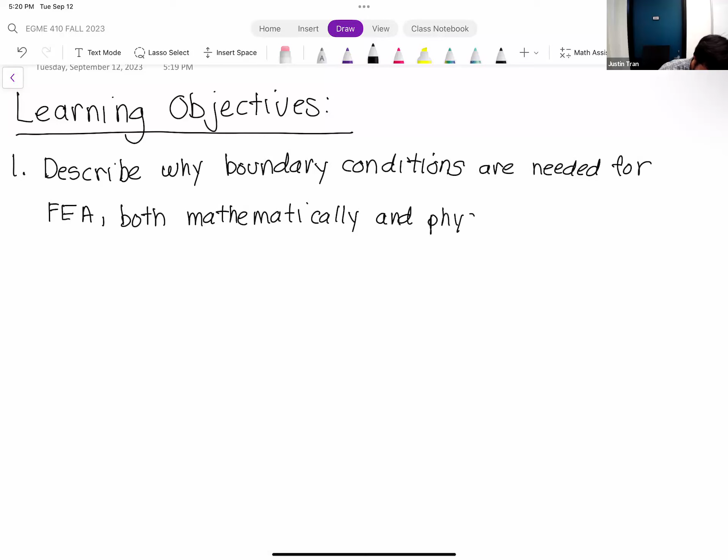We're looking over it, making sure we did it all, and it's pretty close. I'm mostly grading for completeness. I'm not really looking too carefully, so as long as all the figures are there and they were reasonable, then that's all. With this many students, it's hard for you to look really in detail.

So I'll definitely do that for the projects, for sure - the midterm project, final project. But for the activities, just because we kind of do a lot of practice, yeah, they're mostly just practice, they're for educational purposes and for fun. So I'm not really doing any assessment on the activity.

Well shoot, that would be great. It's similar to how you did it, yes, just doing it, yes. Optimization is a little bit different just because there's a lot more mathematical stuff that I can check, and so I will be grading that one. But just one problem per homework.

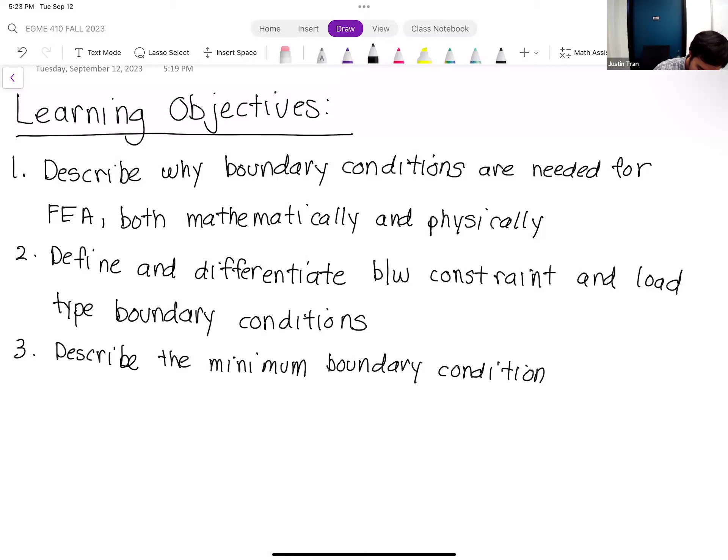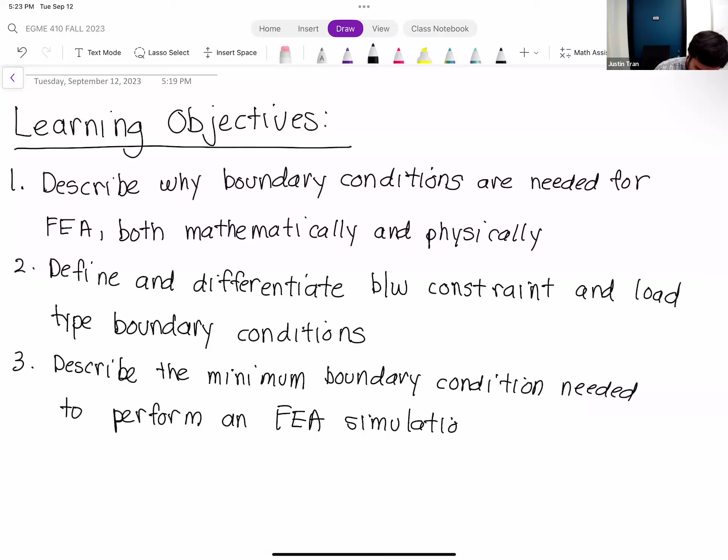That's my whole life plus more on top. Yeah.

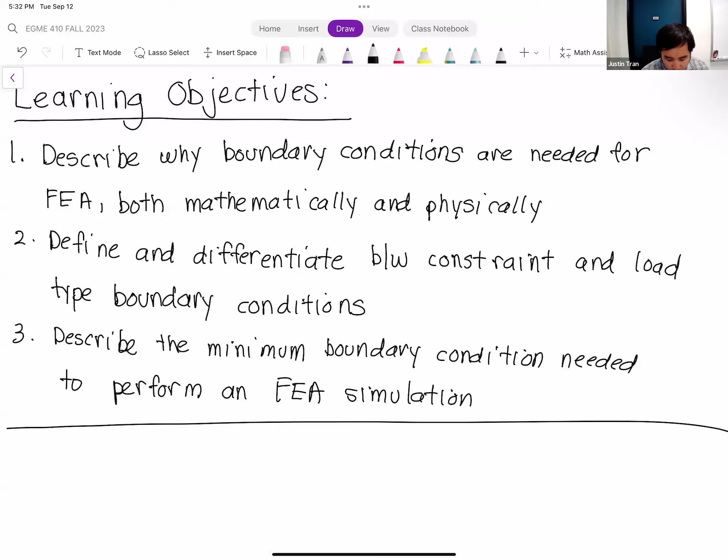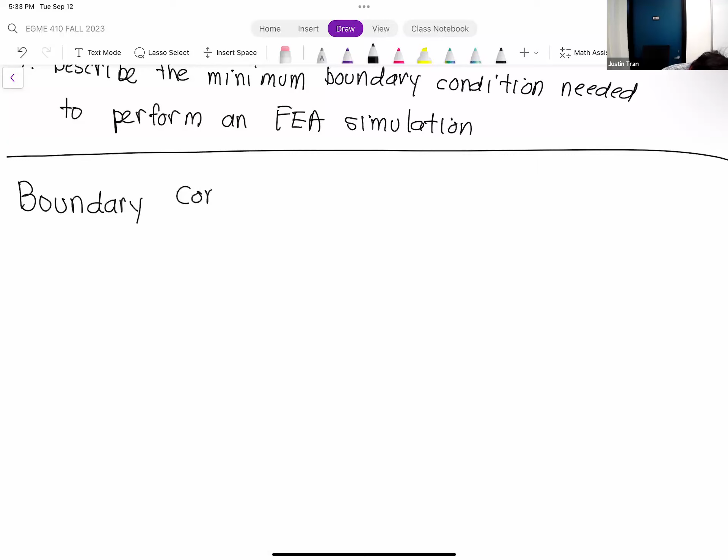So like I mentioned just a minute ago, last Tuesday we talked about meshing, which I think is one of the major steps of applying FEA, especially when you're using commercial software. Meshing is always the first step. The second step is boundary conditions. So boundary conditions are also something that's really, really important.

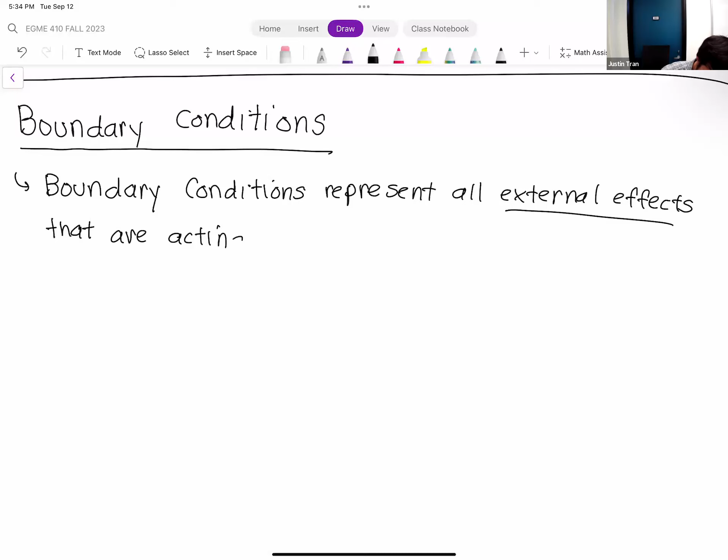All right, so what are boundary conditions? Boundary conditions, in a nutshell, describe all the external effects that are acting on your geometry or acting on your simulation. Any kind of external load or external support, anything that's external to your geometry that's having an effect structurally on your geometry, we almost always capture those in terms of boundary conditions. So that would be kind of the physical definition of boundary conditions and why we need that.

But there's actually a very important mathematical reason for boundary conditions as well. If you remember, from the first week of class, I said that FEA, at its core, is solving differential equations, right? So you have your geometry, you have your CAD file, and what FEA is going to do is solve the equations for structural mechanics, heat transfer, fluid mechanics, whatever. And whenever you have a differential equation, you need to have some boundary conditions on that equation in order to find a full solution.

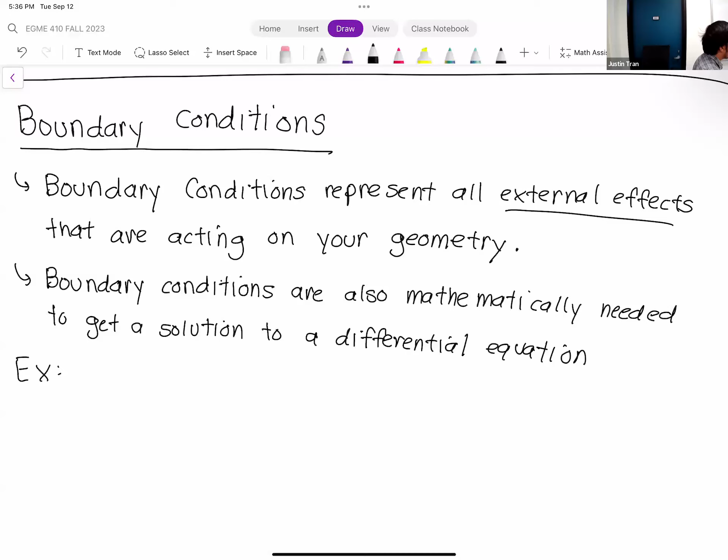So let's solve for a solution to this ODE. We have d squared u dx squared is equal to 3x. Very, very simple ODE, so we don't even need any kind of integrating factor, we don't need the characteristic equation. We can just solve this straight up by integrating.

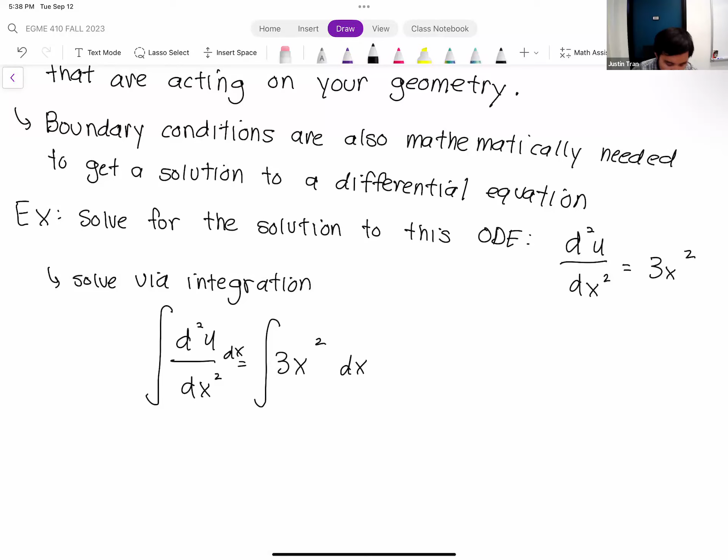We have d squared u dx squared is equal to 3x squared. I'm just writing it down again to make it convenient for me to solve this. All right, so let's take an integral of both sides with respect to x, dx. We integrate the left-hand side, it's going to cancel out one of the derivatives, so we have du dx equal to the integral of 3x squared. So the integral of 3x squared, we do the opposite power rule here, take the antiderivative, we get x cubed.

But since this is an indefinite integral, we don't have bounds on these integrals, we're just taking the integral in general, so we have to add an arbitrary constant to this. We'll call that C1.

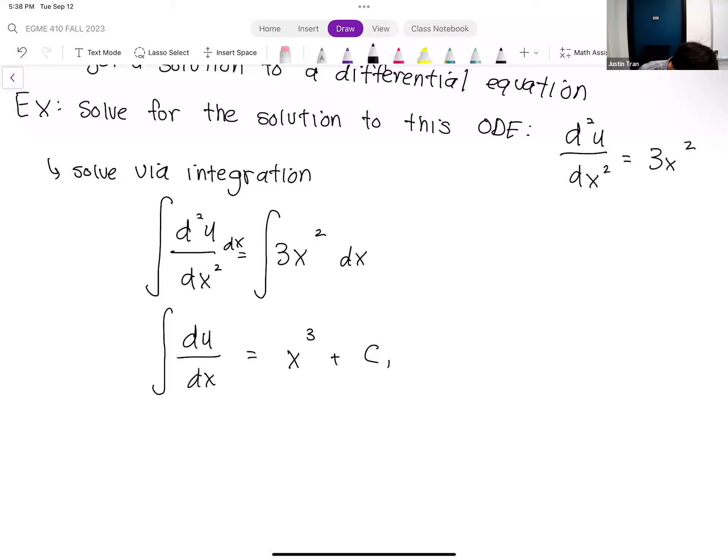Let's take another integral, so we integrate this again. Once again, on the left-hand side, our integral is going to cancel out with our derivative expression, and so we have u of x. On the right-hand side, we have 1/4 x to the 4th, that's the integral of x cubed. We have the integral of C1, where C1 is just a constant—if we take the integral of a constant, we just end up with x, so we have plus C1x. And then once again, since we're taking an indefinite integral, we have to add another arbitrary constant, and so we call that C2. Our solution to this ODE is u of x is equal to 1/4 x to the fourth plus C1x plus C2.

Just a little bit of trivia here: because our solution is arbitrary up to those two constants, we call this the general solution. Any questions on this? We can't say that we have the full solution yet because we're arbitrary up to those constants, so in order to get the full solution, we need to apply boundary conditions.

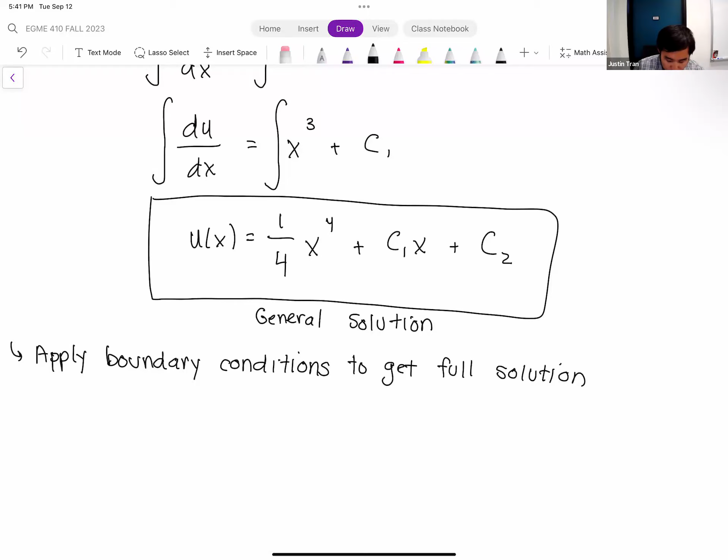All right, let's use two boundary conditions here because we have two constants. Let's say we have a boundary condition at x equal to 0, so we have u of 0 is equal to 18. And then let's say we have a derivative type boundary condition: du dx evaluated at x equal to 10 is equal to minus 5.

So we can apply these two boundary conditions to solve for C1 and C2. Let's start with boundary condition 1, that's the simplest to do. We have u of 0, so we take our general solution and plug in x equal to 0. We have 1/4 times 0 to the fourth plus C1 times 0 plus C2, equal to 18. Everything with the 0 just cancels out, and so we get C2 is equal to 18.

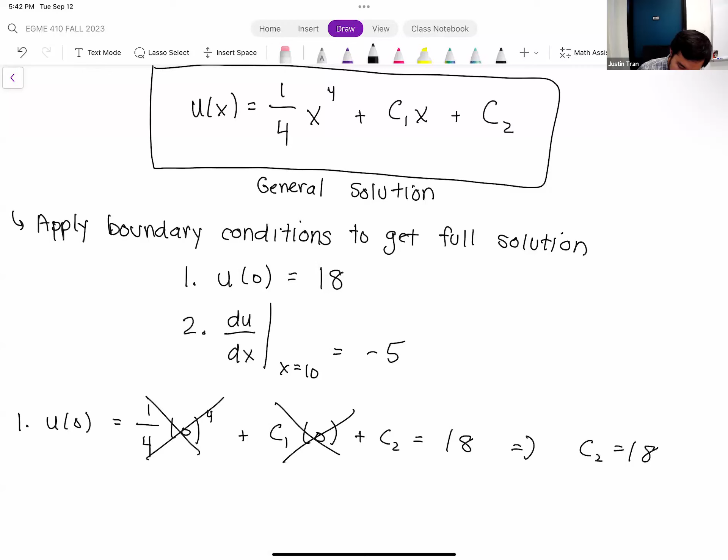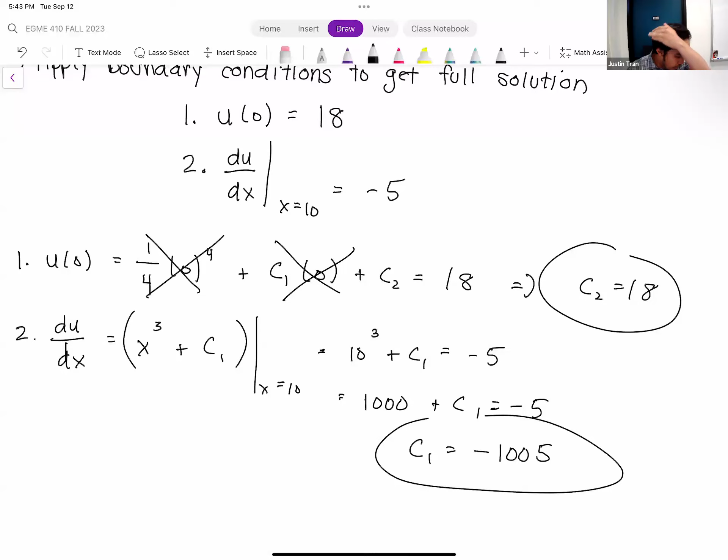So let's do du dx now. To apply this boundary condition, we need to take the derivative of our general solution. We take the derivative with respect to x, we get x cubed plus C1. We're going to evaluate this at x equal to 10, so we have 10 cubed plus C1 equal to minus 5. 10 cubed is 1,000, plus C1 is equal to minus 5. So we solve for C1: C1 is equal to minus 1,005. All right, let's go ahead and plug those in.

Right, and so if we plug those in, C1, C2, we can get our full solution for u of x. So u of x is equal to 1/4 x to the fourth minus 1,005 x plus 18.

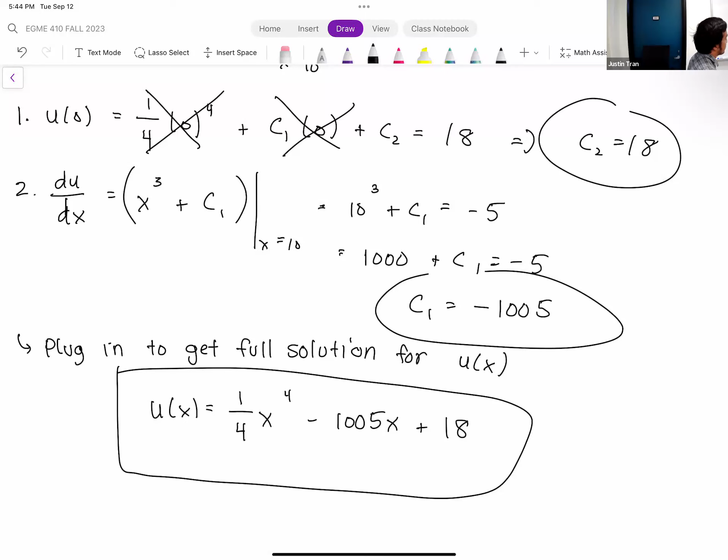Any questions on this example here?

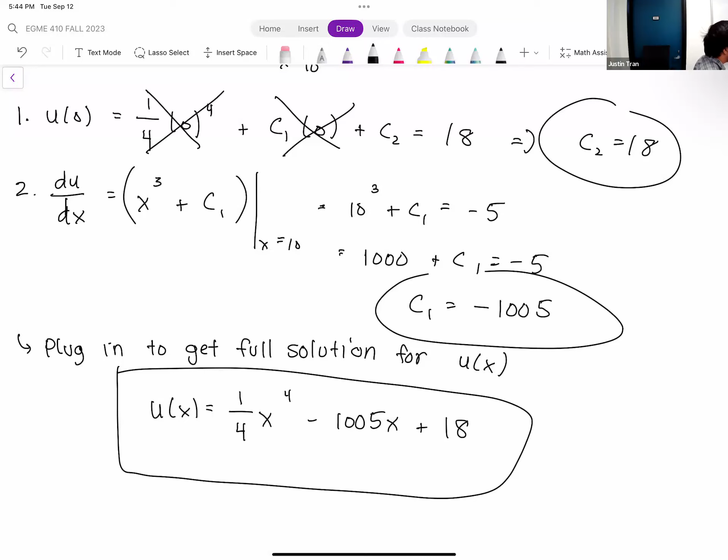I'll answer a question that I think everyone is asking right now: why are we doing math in this FEA class? Why are we doing differential equations? It's to prove a point. Just like when you're solving a differential equation by hand, your job isn't complete until you apply the boundary conditions. FEA is exactly the same. So your FEA simulation doesn't even do anything until you apply the boundary conditions.

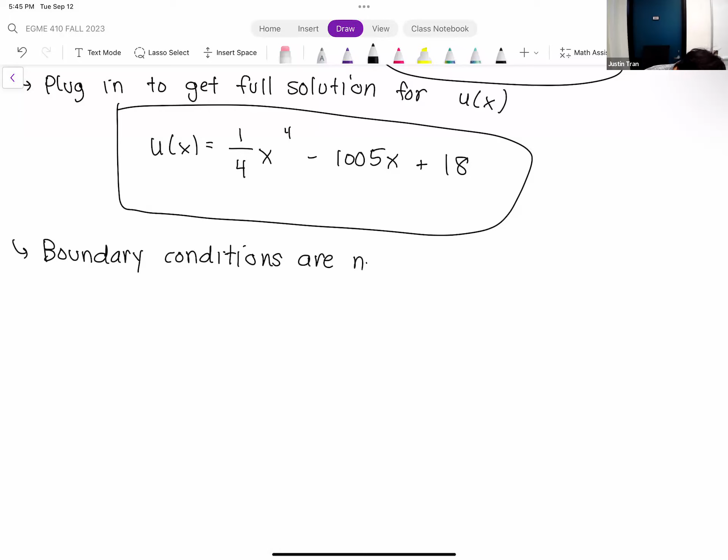In fact, I think some of you tried this last time. After you got done meshing the bike crank, some of you noticed that when you try to hit the solve button in ANSYS, it gives you an error. It says it doesn't know what to do without boundary conditions. So my objective for today is that you understand how to apply boundary conditions, and also why they're actually needed in an FEA simulation.

So mathematically, we can kind of see why in this previous example here, but I think once you understand the role that boundary conditions serve and what they represent, you'll see why they're really needed in FEA.

Along that line of thought, one way I like to think of boundary conditions is that they act as the instigators, or the ones that cause interesting behavior in your system. Maybe instigators isn't a great word, but maybe initiators, or the inputs for interesting behavior.

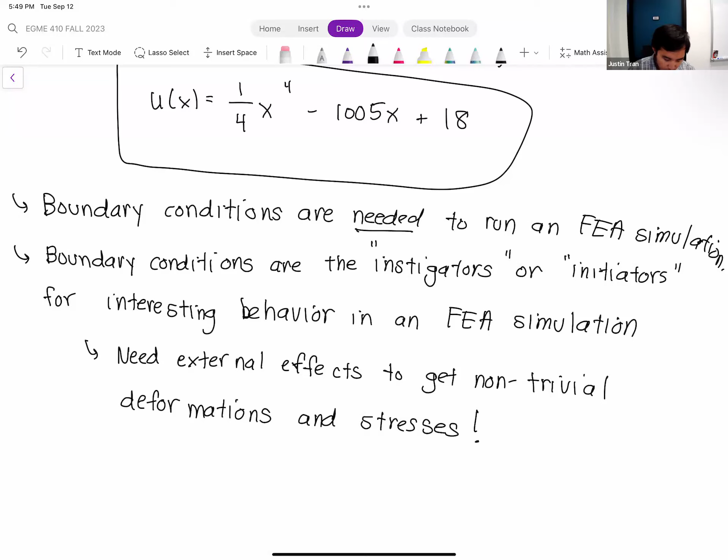So one way you can think of this is that your structure or your CAD geometry is just reacting to how the boundary conditions are, what the boundary conditions are doing to them.

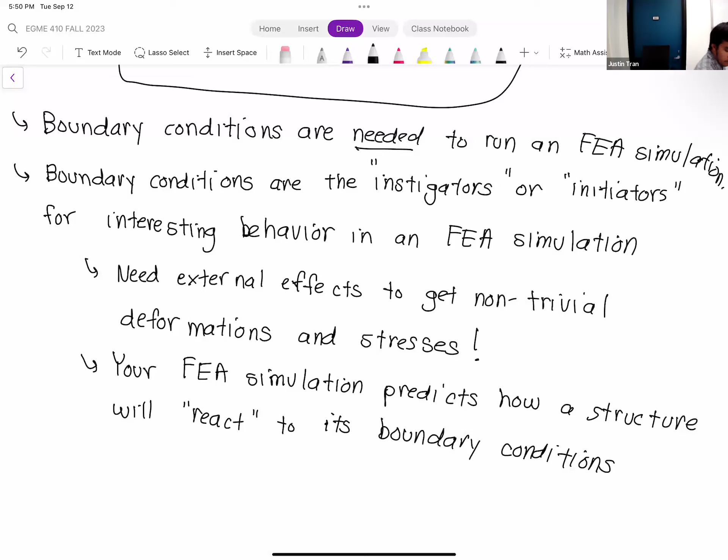Because without any boundary conditions, without any external effects, most structures are just very boring — they're just not doing anything. It's not until you apply these external effects that the structure can respond or react to it. And the way it responds — the amount of deformation, the pattern of deformation, the pattern of stresses — that's determined by the governing equations. So I always like to think of it this way: you have your structure, your geometry, and it has its own governing equations. But until you apply the boundary condition, the structure does nothing. As soon as you apply the boundary conditions, the way the structure reacts depends on its governing equations. That's the relationship between boundary conditions and governing equations.

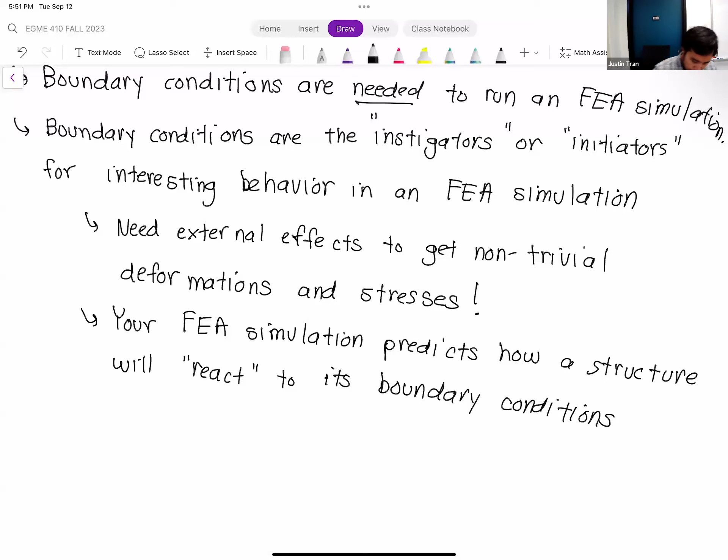Any questions on any of that? All right, and so in FEA, we often like to categorize our boundary conditions into two types.

So the first type of boundary condition that we'll go over are what I call constraint type boundary conditions.

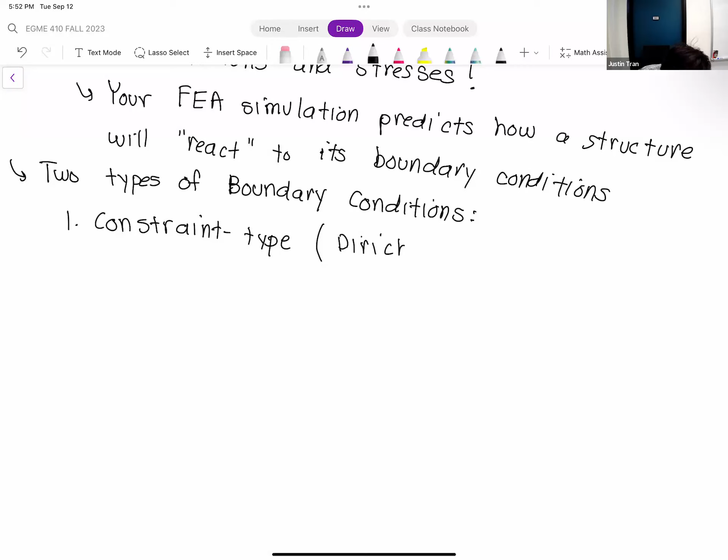There's a scientific name for the constraint type boundary conditions, named after the guy who formalized the theory on it, so this is called Dirichlet. You don't need to know that, that's kind of just trivia. But sometimes, just because that's how I learned it, I might say Dirichlet boundary conditions on accident, but what I mean is constraint type.

And the other type of boundary condition are load type boundary conditions. These are called Neumann boundary conditions.

So obviously the names I've chosen for these, constraint type and load type, kind of have a structural flavor, right? And you do have Dirichlet and Neumann boundary conditions for thermal FEA, for fluids FEA as well. Mathematically, they're the same. I think constraint type and load type are a little bit easier to understand and remember when you're first learning FEA.

All right, so let's go over constraint type boundary conditions first. Constraint type boundary conditions get their name because they basically constrain the solution variables to have a specified value.

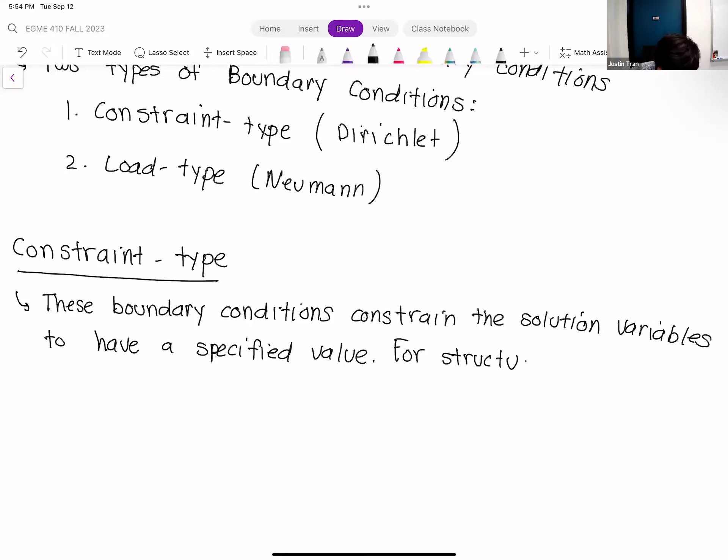All right, so what does that mean for structural FEA? For structural FEA, our primary solution variable is the deformation. So what that means is that the deformation is the first thing that the FEA will solve for, before it solves for the stresses.

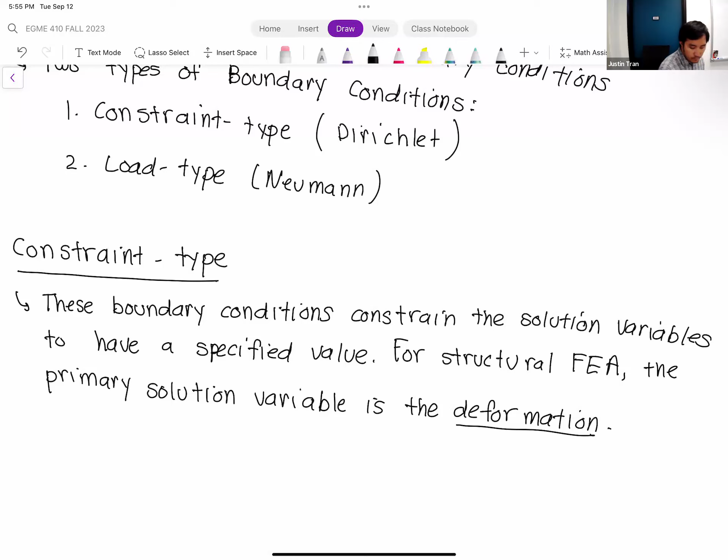Remember, the deformation is the amount that the structure will deform in response to loading. So that means that when we apply a constraint type boundary condition to a structural FEA, we're forcing the deformation to have a certain value at the location where we applied the boundary.

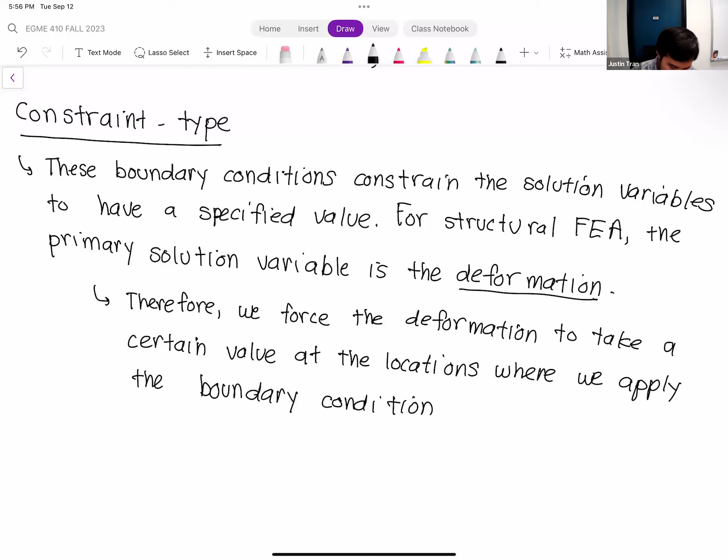All right, so the most common example of a constraint type boundary condition that we've used before, and we're going to continue to use in almost all of our activities, is a fixed support.

Up until this point, whenever we've used a fixed support in an Ansys activity, what I've told you is that the fixed support should be a place where your object is being attached to or bolted to another external object that's much bigger than it. So that's still true, and so that intuition is still there. But mathematically, what's happening under the hood is that for all the locations, all the areas that we're applying the fixed support, we're saying that the deformation of those areas has to be equal to 0.

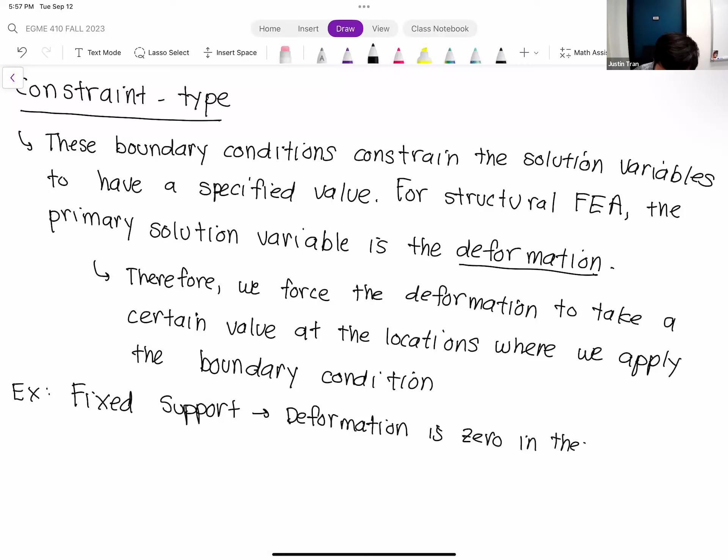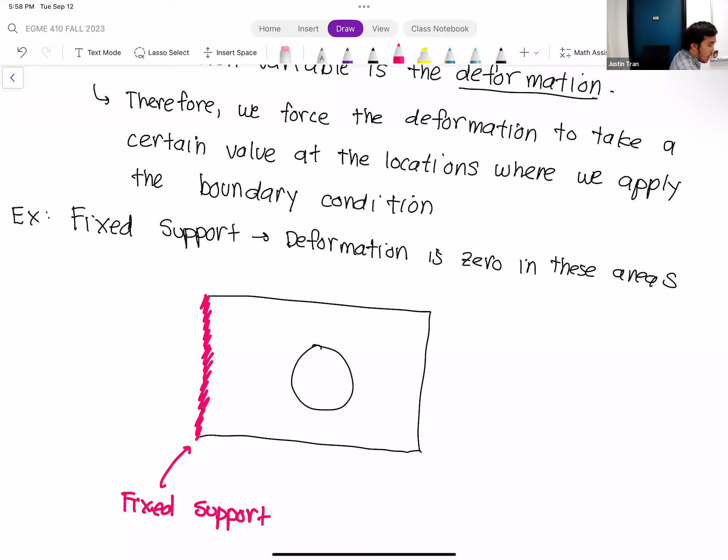So we think back to our plate with a hole, in activity 1. If you remember from that activity, on this edge right here on the left, we applied our fixed support, because what we said at the time is that our plate here on that left-hand side is going to be attached to a bigger structure. If you go back to activity 1 and look at your deformation field, what you should see is that in this area right next to that fixed support, the deformation is going to be 0.

The deformation is 0 because we're essentially forcing it equal to 0.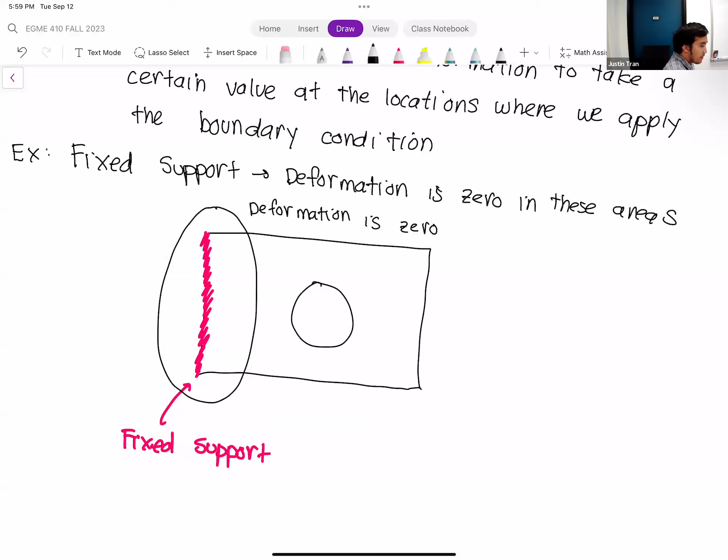And so we can see this kind of mathematically in the example we did earlier today as well. Looking back at the example we did earlier with a differential equation, we do have a constraint type boundary condition here. Let's look at the two boundary conditions that we specified: we have u of 0 is equal to 18, and then we have du/dx at x equal to 10 is equal to -5.

In this example, our solution variable, or what we're solving for, is u. Based on that fact, we can identify which of these boundary conditions is our constraint type, or our Dirichlet type boundary condition. And that is the first one. So what we're saying with this statement is that at x equal to 0, we're going to force the solution u to take on a value of 18.

Thus, that is our constraint type boundary condition. Any questions on that?

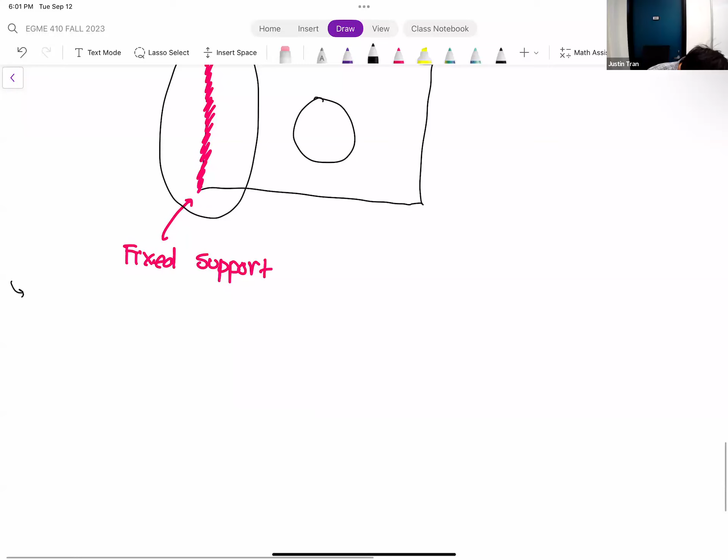Physically speaking, you should apply fixed supports at locations where your structure is attached to something much bigger than it, or much more stable.

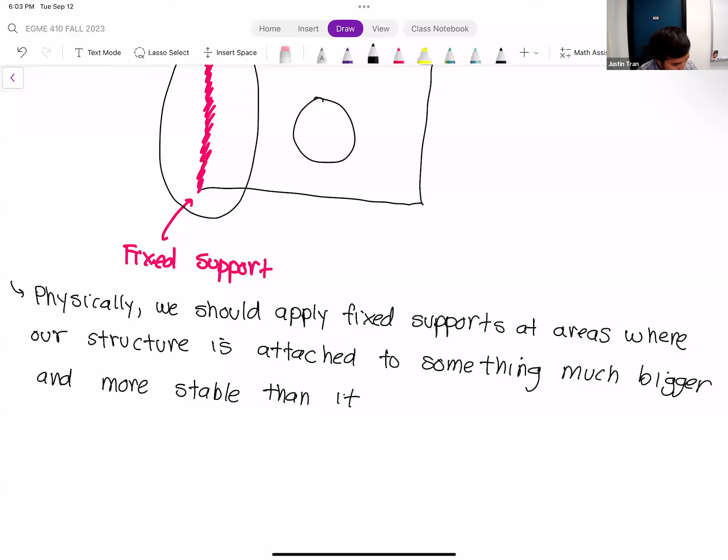Okay. Another type of Dirichlet boundary condition, or constraint type boundary condition, that we can use—it's not that common, I don't think we're going to use it much in this class—is a displacement type boundary.

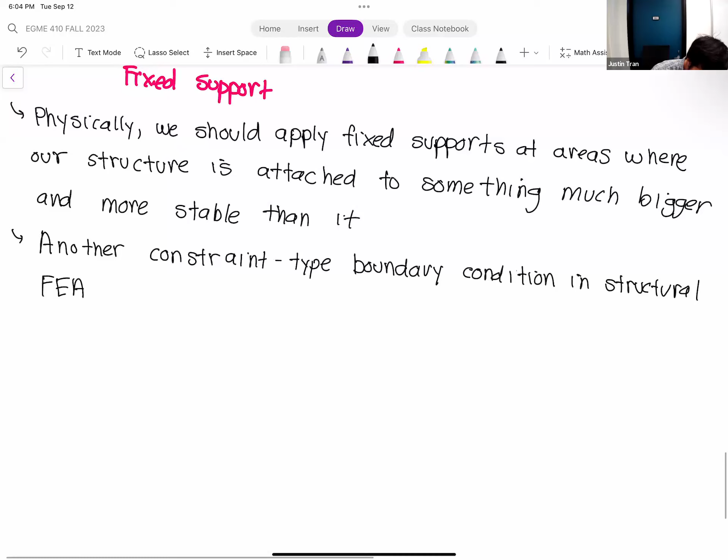Some of you have noticed this already, and a couple of people have asked me this in the activities: what is that displacement boundary condition? The displacement boundary condition, mathematically, is the same as your fixed support, except that instead of setting the deformation equal to 0, you can actually specify how much deformation it's going to have.

So you can almost think of the displacement boundary condition as a more generalized fixed support, where you have freedom to choose, if there is, a preset deformation.

This can be useful in cases where you have a structure and you know that it's displaced by a certain amount from its resting configuration. One example I always like to bring up is a fishing rod. A fishing rod has its own resting length, its own resting configuration. But let's say that under a certain load—say you have a fish on a line—the tip of the fishing rod is going to displace by, let's say, 3 centimeters. So instead of trying to predict how much force you need to apply to get a deformation of 3 centimeters, you can just apply 3 centimeters of deformation right at the end using a displacement boundary.

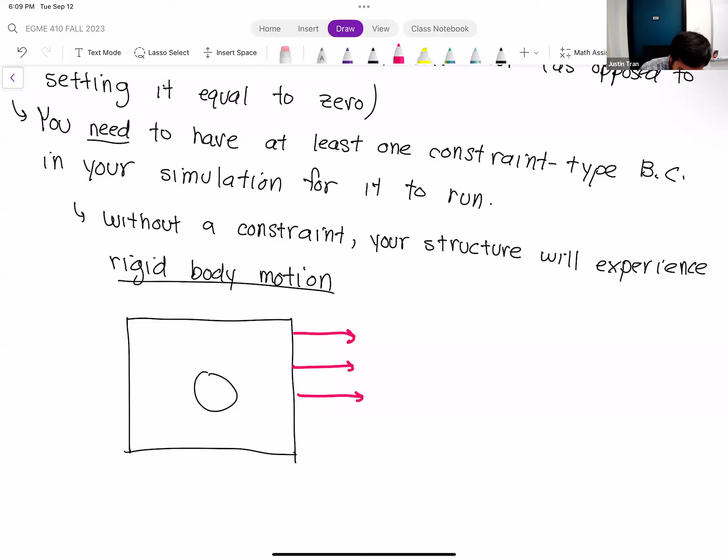But let's say that we didn't fix it, but we applied our same tensile load to the structure. Without the fixed support there, this thing is just going to keep moving, right? Because there's nothing preventing it from moving, since we don't have any constraints. Without the constraint there, your structure is just going to go flying in whatever direction you're applying the load. So you need to have those constraints in order to prevent that from happening.

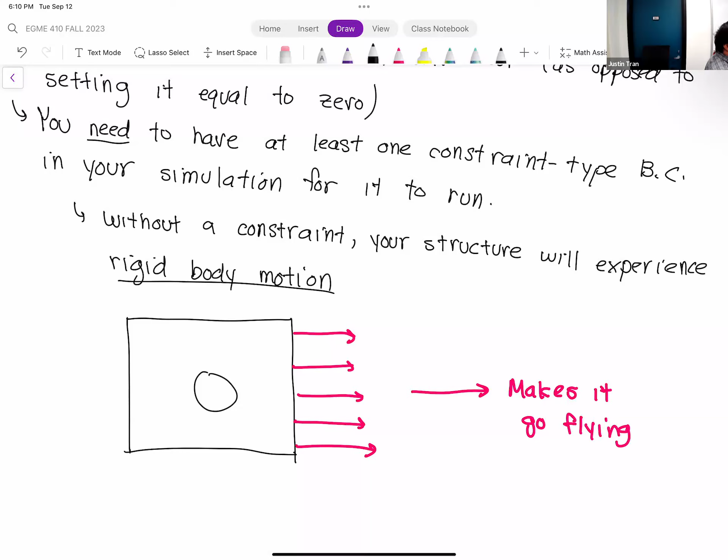It is possible to simulate motion in FEA, and we are going to do an activity for that in the second half of the semester. But we're not concerned with that at the moment. So right now we're mostly just doing static simulations.

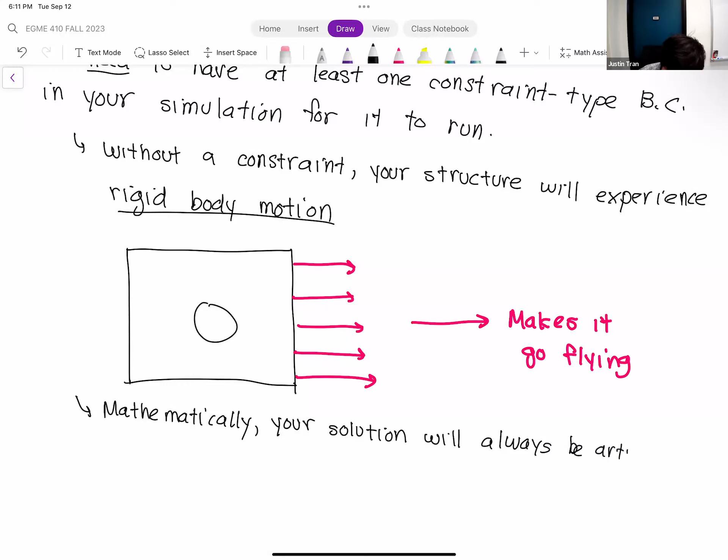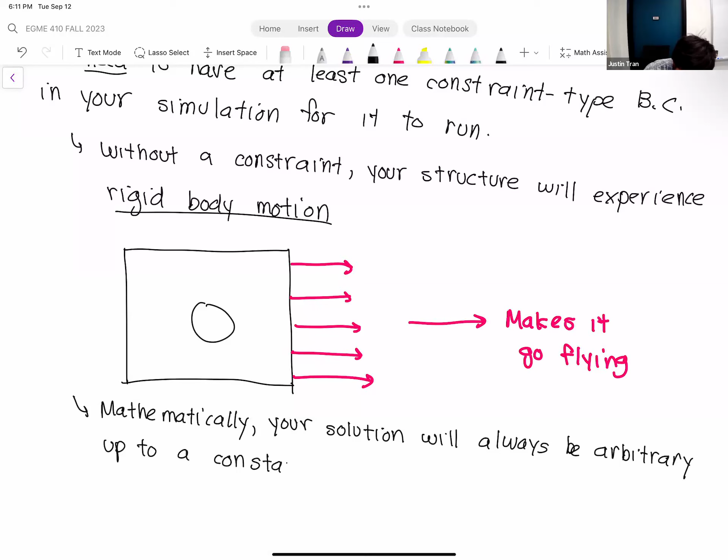So that's the physical reason why you need to have a constraint. There's a mathematical reason for it as well. Mathematically, if you don't have a constraint type boundary condition, your solution will always be arbitrary up to some constant, so you will never be able to find the full solution because you're always going to have a constant that's kind of unaccounted for.

I'm not going to go through the mathematical details for this, but if you take the very first example we did today with the differential equation and replace the first boundary condition—that was our first boundary condition, which said that u of 0 is equal to 18—and instead replace it with another derivative condition, let's say du/dx at x equal to 0 is equal to 7.

So now our two boundary conditions are going to be the following: we have du/dx at x equal to 0 is equal to 7, and du/dx at x equal to 10 is equal to -5. If you have this situation, and I'll let you verify this yourself, what you'll see is that it's going to be impossible to specify a value for C2.

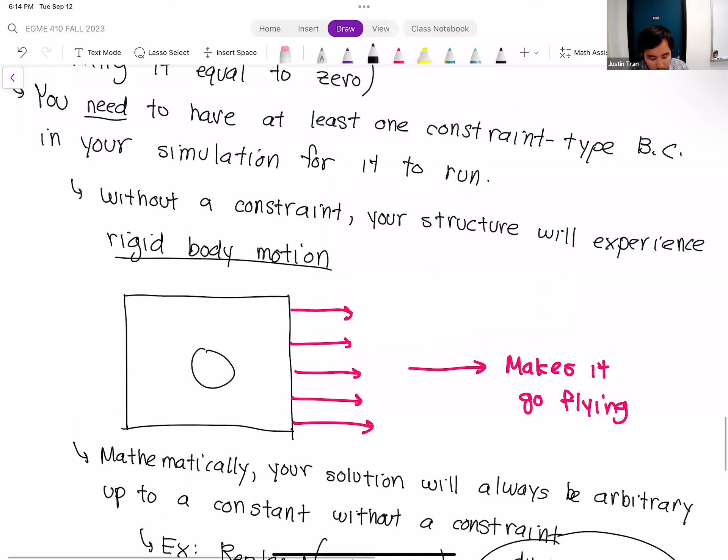Remember, you can never run an FEA simulation without at least one constraint type boundary condition. In fact, ANSYS will actually stop you. If you try to run a simulation with only loads—only forces, only pressures—then ANSYS will say, hey, you can't do this, you need to have at least one constraint. Any questions on that?

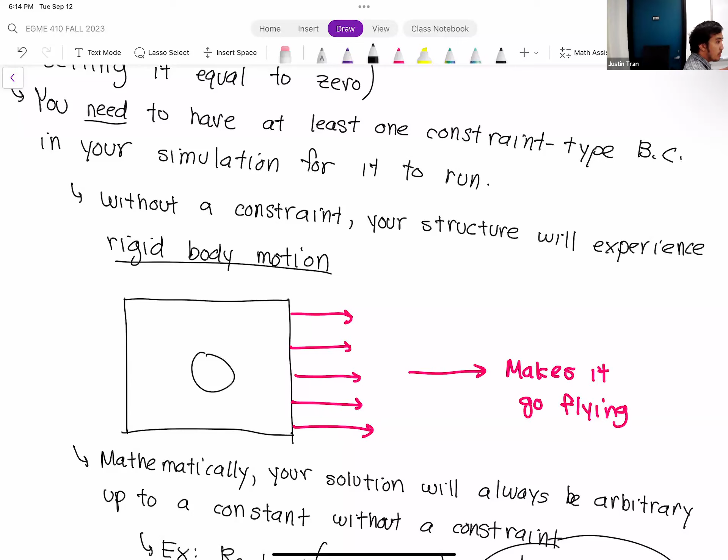Okay, so that's constraint type boundary conditions. Let's go over load type boundary conditions next.

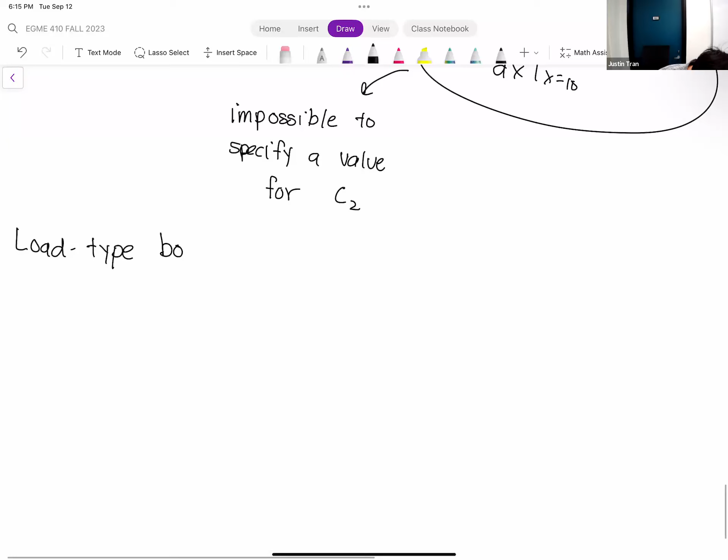So what are load type boundary conditions? Whereas constraint type boundary conditions have a fairly narrow, well-defined definition, load type boundary conditions are kind of just everything else. Everything external to your system that is not a constraint is basically classified as a load. The best way I can describe it is that load type boundary conditions are any external effect that has an indirect effect on your solution variables.

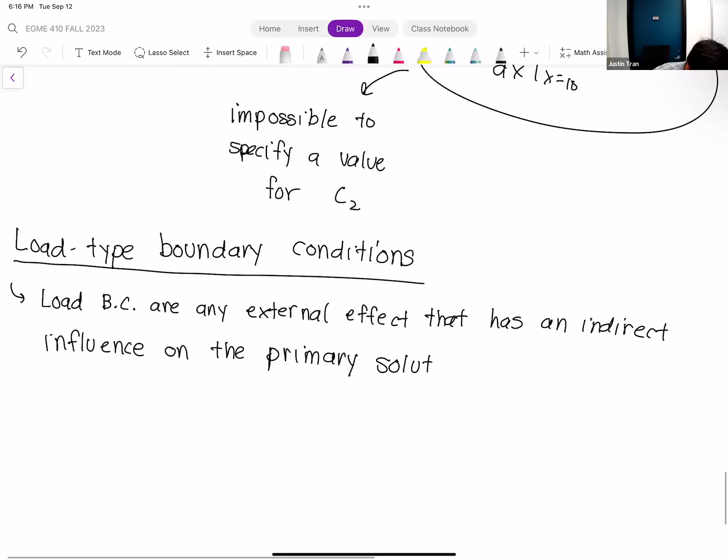Remember, our primary solution variable in structural FEA is the deformation. It goes without question that if you apply a force, a pressure, or a torque, all of these things are going to affect the deformation.

That's no question, but the important thing is how it achieves that deformation. When you applied a 100-pound force onto the bike crank, there wasn't a one-to-one comparison, or a way to predict that once we apply 100 pounds of force, our deformation would be X, because that relationship is kind of unclear.

A lot of that depends on the material of the bike crank, it depends on its geometry, it depends on the exact nature of the equations. That's what I mean by indirect - it doesn't directly specify the value like a constraint type boundary condition does.

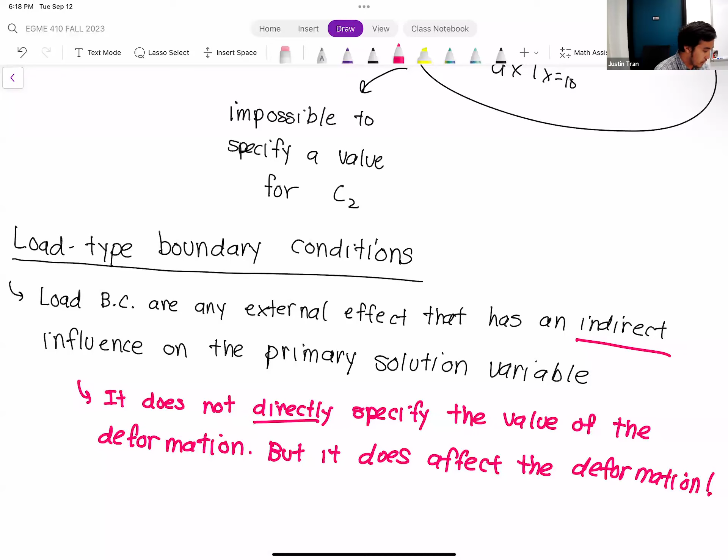Just because it doesn't do it directly, it doesn't mean it doesn't have any effect. It's just that the relationship between the two is not 100%. Let's look at the example we did earlier today. In our first example, we had one load type boundary condition.

So our load type boundary condition from before was our derivative boundary condition: du/dx at x equals 10 equals minus 5.

Remember, our primary solution variable in this case is u. Through this boundary condition, we're not directly specifying the value for u. Instead, we're saying that the slope of the line, or the derivative of u, has to equal a certain value. In the end, this is going to cause u to have a certain value at that boundary, but we're not directly specifying it.

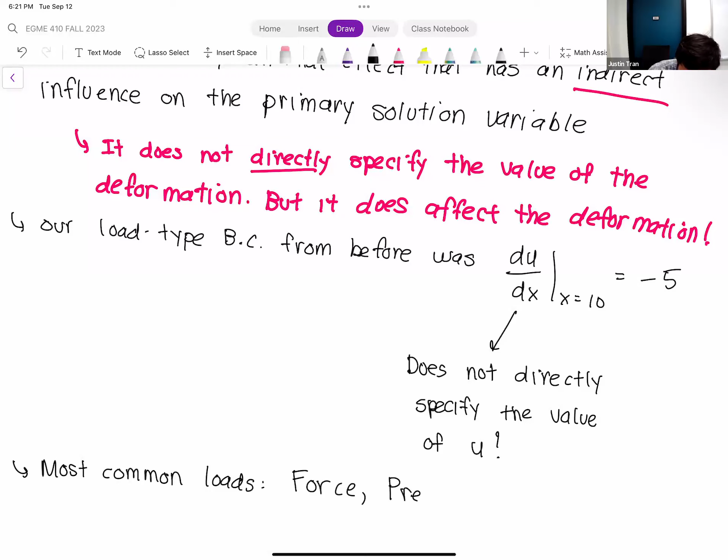We've already seen a couple through our first two activities: things like force, pressure. You can also apply stress type boundary conditions - maybe you want to apply shearing or something like that. You can also apply a torque, or alternatively, a moment.

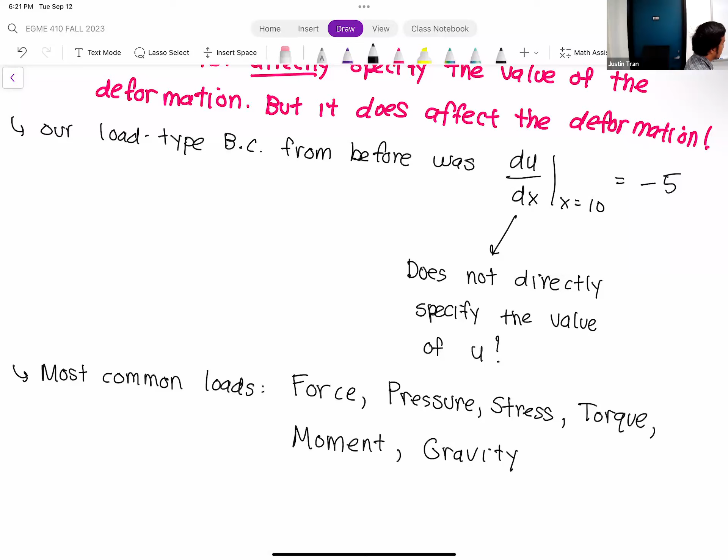There's a special load type that's present, and we're going to use this in activity 3, which is gravity. Gravity is a little bit unique because technically it's an external force, but it's not applied externally. Gravity is what we call a body force, because it's something present throughout an entire body.

There's no gravity hand pushing you from above - you feel gravity all throughout your body, so we apply it a little bit differently. Gravity has its own kind of load. There are lots of other ones too, but the most common ones you'll see all belong to this category.

The important thing is that when you're applying a load type boundary condition, you want to be very aware and very sensitive to the real life situation it represents.

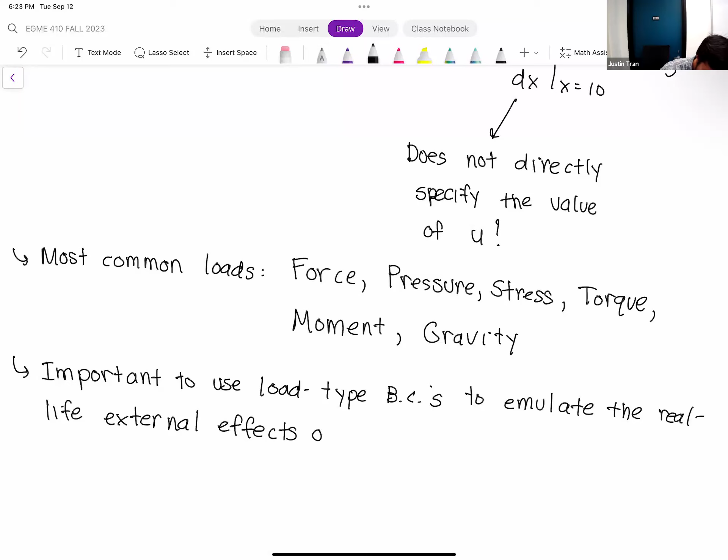Oftentimes the loads are where a lot of the interesting things are going to occur. We'll do this exercise when we do ANSYS activity 3 next week, where we'll consider lots of different types of loads.

We're going to consider gravity, we're going to consider wind pressure in multiple directions, and we'll assume external weights and things like that. For all of these external effects, it's really important that you think about what's the best type of load you can use to actually represent this effect.

Which seems obvious, right? You want to use the thing that makes the most sense. But when you start to do FEA in practice, what you're going to see is that there's usually not a clear-cut choice for how you should model these external effects.

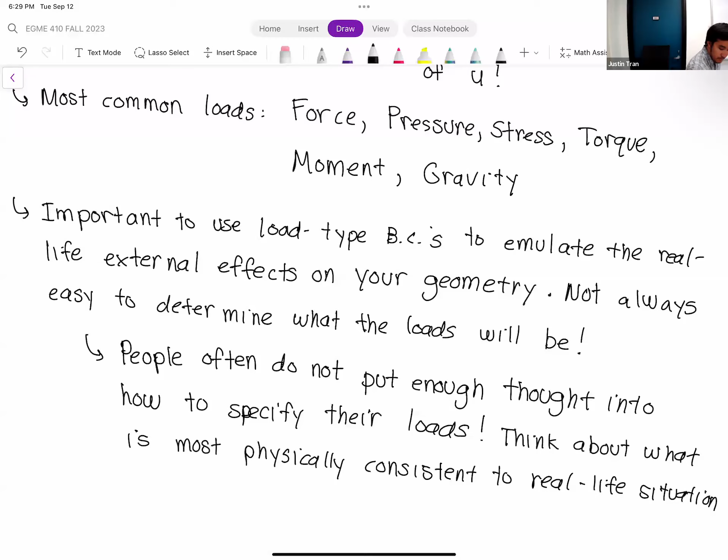Any questions on this? Okay.

Another note I'll make on load type boundary conditions is that they're actually not required. You can run a simulation with zero loads if you want.

You can run a perfectly valid FEA with only constraints, which kind of seems unbelievable. Let me give you an example.

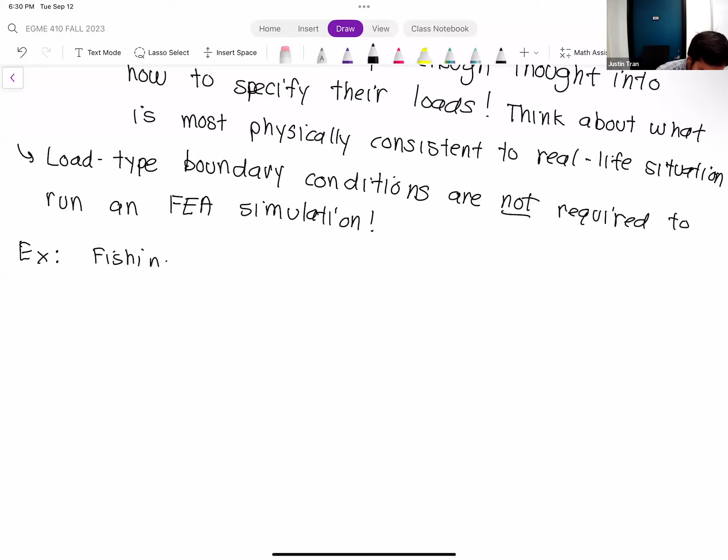Let's say we have a fishing rod, something like this. For some reason the fishing rod is thick in the middle because I suck at drawing, but just use your imagination. Let's say that this fishing rod is being held by a person.

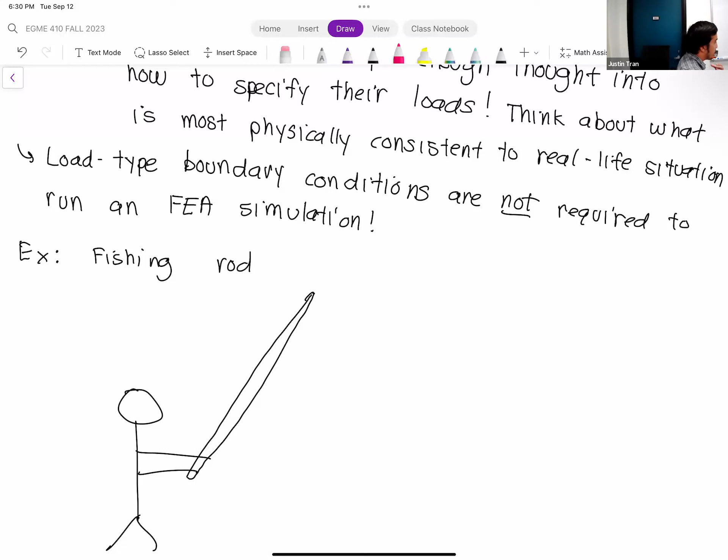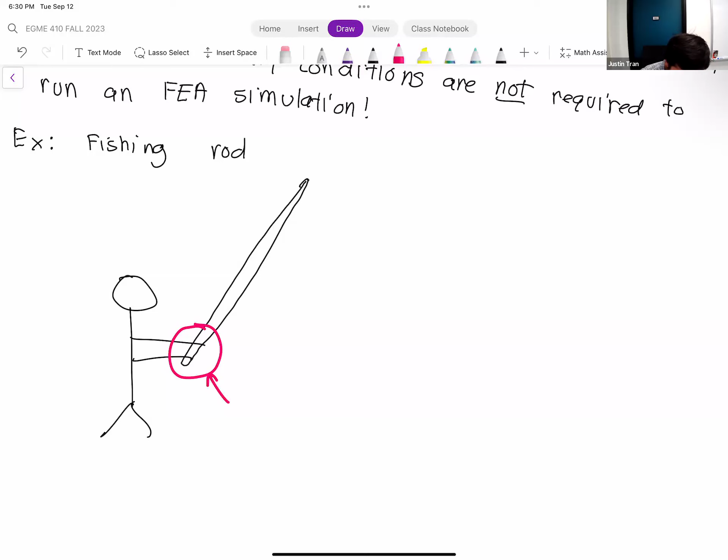In this particular case, our fishing rod is attached to the person, and this person is attached to the ground. So we can reasonably expect that this part right here, where it's being held, we can apply a fixed support. Because compared to the other parts of the fishing rod, which aren't really attached to anything, this is probably as close as we're going to get to a fixed support.

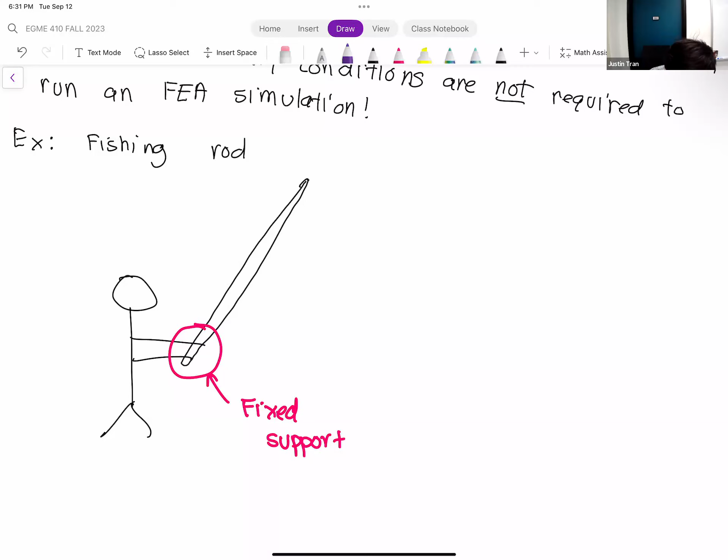Now let's say the person has caught a fish. You've probably seen this visually, that when there's a fish on the line, the fish is going to tug the fishing rod that way, and the fishing rod is going to bend quite spectacularly. So we have a fishing rod that bends this way.

Okay, so there's a couple ways that you can apply the condition at the top. Because it's kind of clear from this image, we should apply another boundary condition at the tip of the rod. One way we can apply this boundary condition is as a force, right? We know that as the fish pulls on the fishing rod, it's going to apply a force on the tip, and that force is going to cause the tip to displace.

So that would be a very traditional type of simulation. We have one fixed support, one constraint, and one load at the end. The combination of those two is going to cause the rod to deform. That's one way we can do this. Another way that we can apply the simulation and get the exact same results, same deformations, same stresses, is if we specify a displacement type boundary condition here.

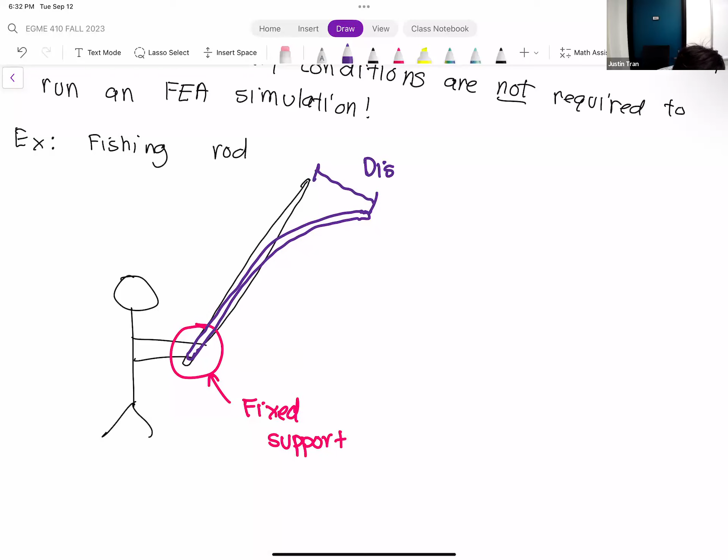Let's say that you are doing this FEA analysis because you just got back from a fishing trip, and in a video someone filmed you catching this fish, this rod just snaps and breaks apart. You don't know how much force is being applied because you don't know how strong the fish was that you were trying to reel in, but from the video you can kind of visually see how much that tip of the rod is displacing. So you can get a fairly accurate, or at least a pretty close, approximation for what this displacement is.

Based on observation or other data you have, you can apply that displacement directly. What you should see is that up until the point where the rod snaps, you should be able to get a good estimate of the stresses inside the rod. If you apply that displacement directly, it's going to cause the rest of the rod to stress and displace. Then you should be able to predict and see that yes, the equivalent stress in the rod exceeded its yield strength, and that's what caused it to snap.

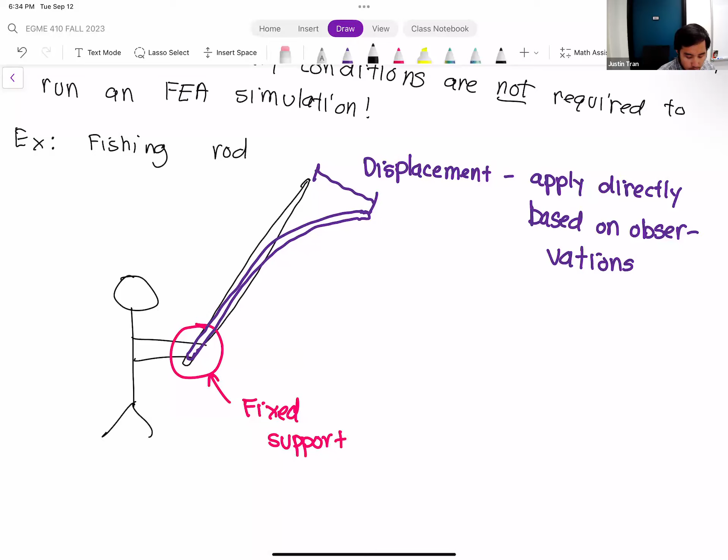One last note about load type boundary conditions—this applies to boundary conditions in general. When you first learn about boundary conditions, the temptation is to try to apply a boundary condition on every single surface of your model. The good news is that that's not necessary.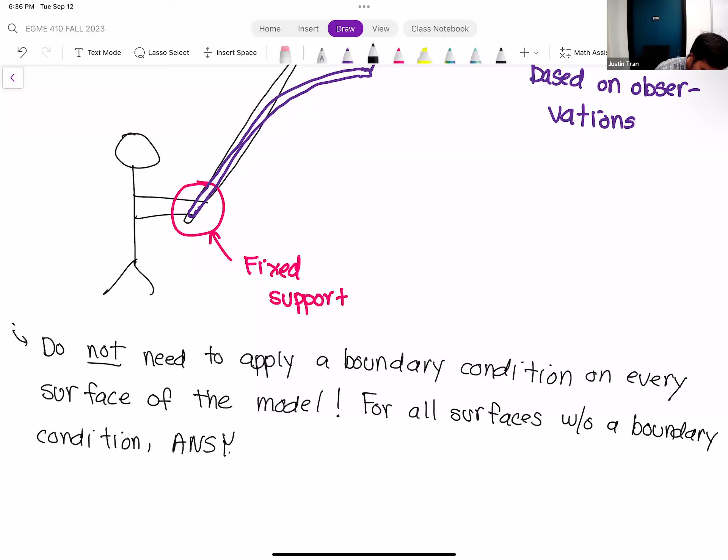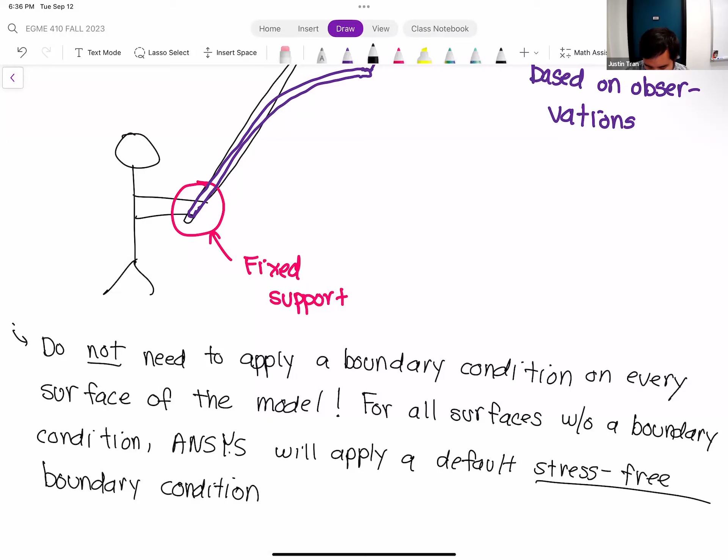In fact, probably the majority of the surfaces in any given FEA simulation are going to have no boundary condition applied. That's okay, because when you don't apply a boundary condition on a particular surface, ANSYS actually applies a default boundary condition. The default boundary condition, at least for structural FEA, is what's called a stress-free boundary condition. There's no external load, no external anything applied there, so the stress should be equal to the air that's around it, which is usually stress-free.

One last practical note, then we'll wrap it up. I've already discussed this with a few of you actually, but this is a note regarding how to apply your boundary conditions. When you apply boundary conditions in ANSYS, you have the option of applying it at a point, on an edge or line, or on a surface.

Generally speaking, when you go to apply your boundary conditions, whether it be a fixed support or a load, it doesn't matter—for any type of boundary condition, you want to apply it on as wide a surface as possible. If you have the option of a surface versus a line, edge, versus a point, it is always preferable to choose the surface over the edge, and if that's not possible, it's always preferable to choose the edge over a point. But you always want to make sure you're staying physically feasible—applying the boundary conditions in the right places, but not just at a point. You're doing it over an entire surface.

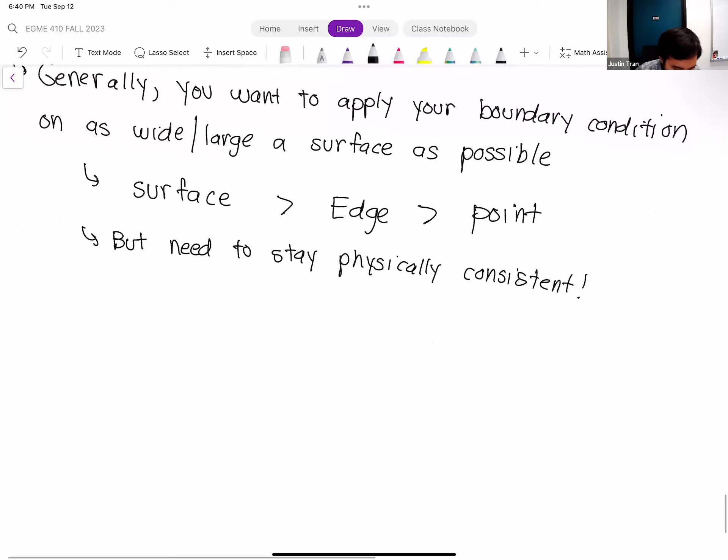For example, in activity 3, the subject is going to be a signpost. We have a long cylindrical object, a very long sign, basically a freeway sign. The sign is attached to the ground, so we're going to apply our fixed support on the bottom.

The reason for this is that when you apply boundary conditions on narrow areas like an edge or a point, you may cause some weird mathematical issues. Let's say you have a load applied at one small point, right? That may cause that point to collapse just because you have so much pressure on one point versus distributing that over a larger area.